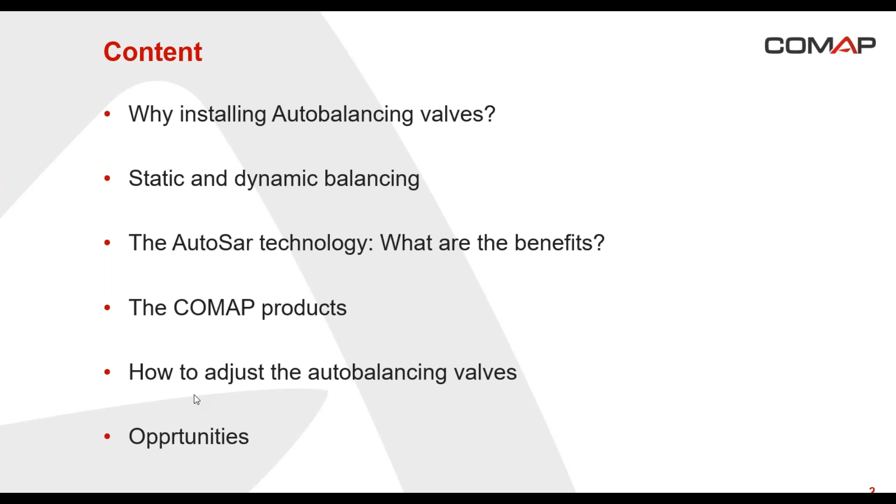The content of my presentation is as following. First, the reason why it's interesting to install auto-balancing valves on the radiators. Then I'll bring you back to the basic knowledge about static and dynamic balancing, because it's not very well understood by everyone. Next, I'm going to describe the AutoSar technology to give the benefits of this technology, and I will present the full range of the COMAP products. A reminder about the way of adjusting the nominal flow in the radiator, and at the end some figures to show you how much we can save with the AutoSar technology.

So let's start with the reason why it's smart to install auto-balancing valves. The example is a residential building where all the radiators are equipped with classic thermostatic valves. The heating network is properly balanced. That means all the radiators get the right water flow.

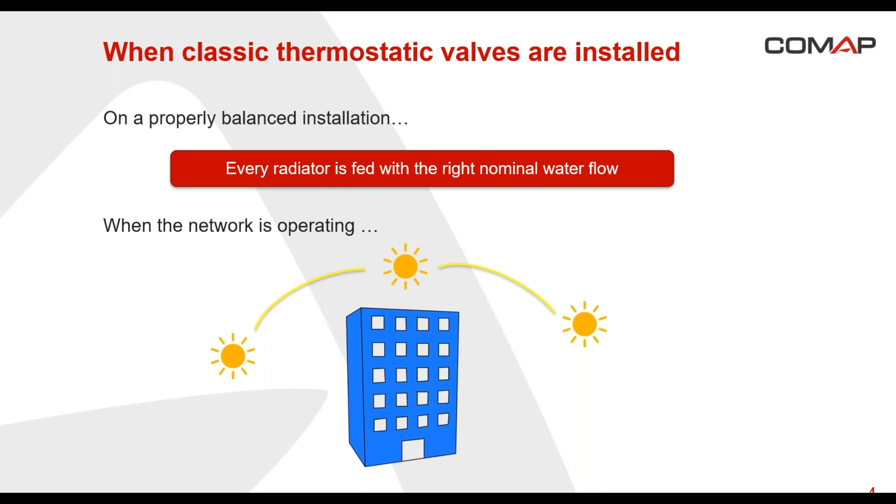Now, what happens when the heating network is operating? In January, for example, there are some sunny days. In the apartments that receive the heat from the sun, the thermostatic valves close because the ambient temperature is getting higher. In the apartments where there is no heat contribution, the valves remain open. When the valves close, the water has to go somewhere, and overflows occur through the open thermostatic valves.

You may say that the pump is going to adapt to the situation and decrease its speed in order to reduce the water flow. That's true, but the pump can only see the pressure at its terminals; it's not able to see the radiator terminals. It's too far, so it's not enough, and it's necessary to add something to improve the energy saving in the network.

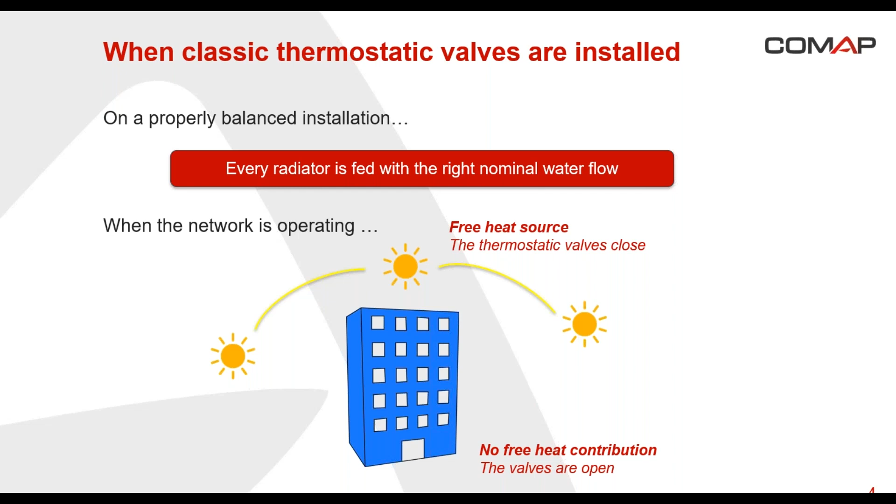So we've just said that there is a water overflow into the network. As a result, an overflow in the radiator means too much heat. Too much heat means that it's not comfortable for the people because it's too hot, and it's also too expensive.

Next, an overflow means also that the water velocity through the valve is higher. It may lead to noise, and it's not comfortable, and it costs money also. A higher velocity will also lead in time to the premature wear of equipment, and it will cost money. And third, an overflow will lead to a higher water return temperature, and the boiler may not condensate. It also costs money.

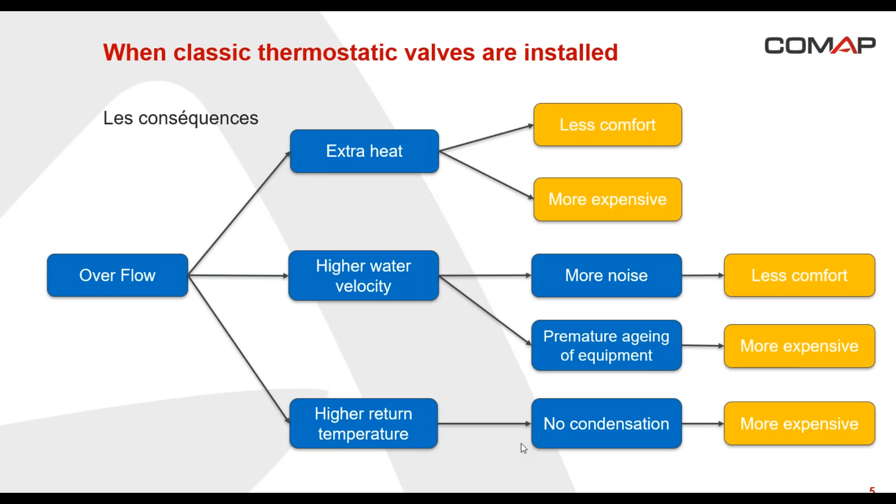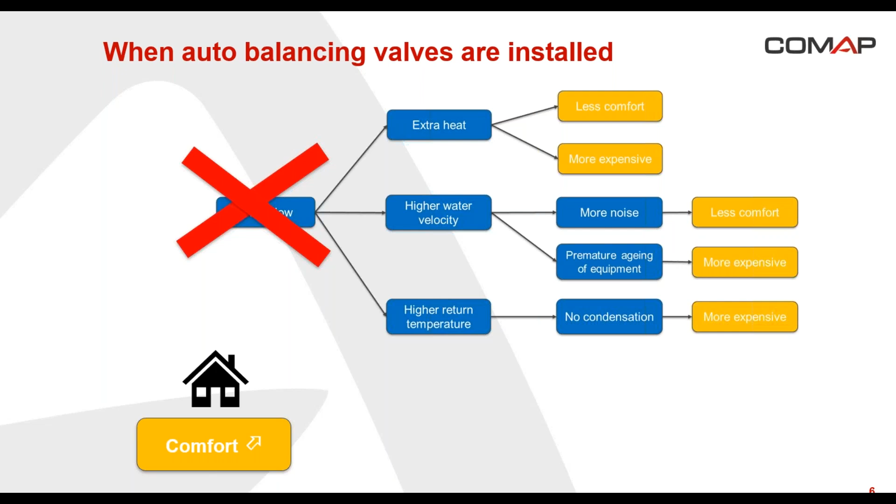So when auto-balancing thermostatic valves are installed, there is no overflow in the network. That's the function of the auto-balancing thermostatic valve, to prevent overflow in the radiator. As a result, if there is no overflow, the comfort is guaranteed. There is no noise, there is no extra heat, there is no parasitic power consumption, so it's money saving. And as you are going to see in this presentation, AutoSar is easier to adjust.

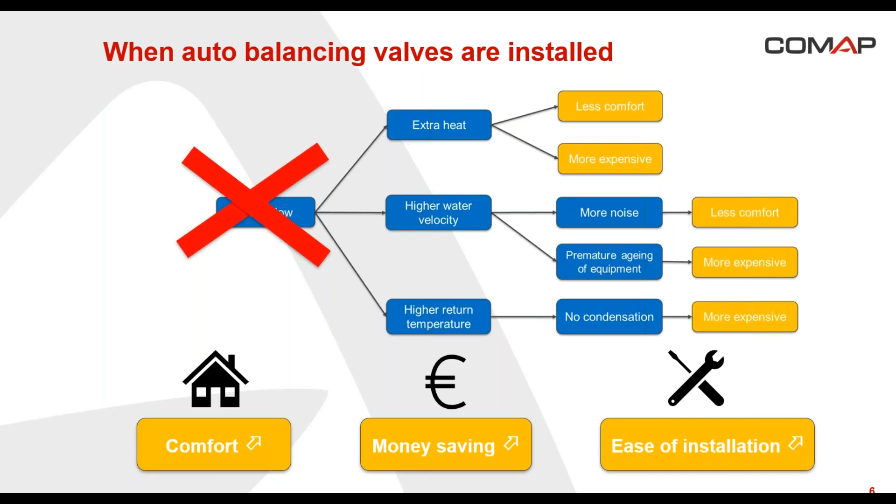Now let's talk about static and dynamic balancing. I've tried to illustrate that with pictures. First, the static balancing. Imagine a tank, here it's a kind of tank with a tap above. First of all, the level of water is adjusted. In the heating network, we have to adjust the flow for every radiator.

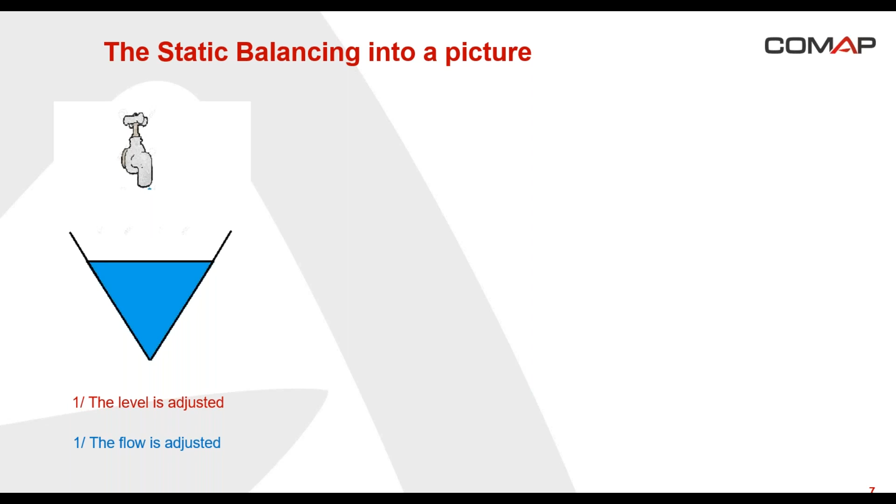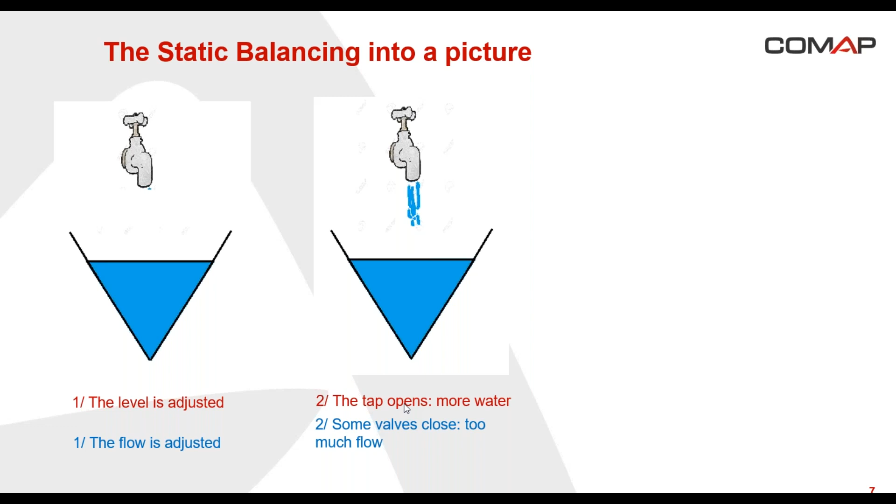Now the installation is operating, and the tap opens, so the level is increasing. There is too much water. In the radiator network, some thermostatic valves close and some valves remain open, and there is too much water through the valves that remain open. As a result, for the tank, it's flooding. In the heating network, a water overflow occurs through the valves that remain open.

In that case, the first thing was to adjust the level in the tank, or regarding the heating network, to adjust the flow everywhere. That's the static balancing. It must be done all the time. When the network is operating, it doesn't prevent overflow through the valve.

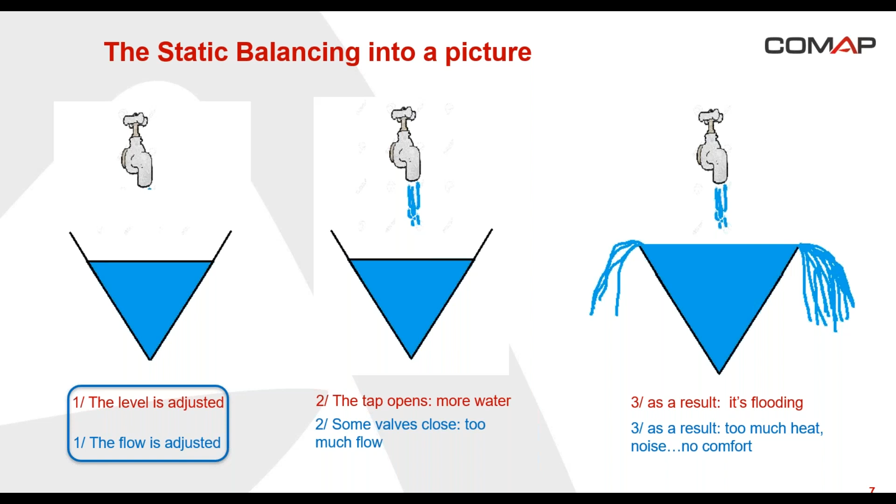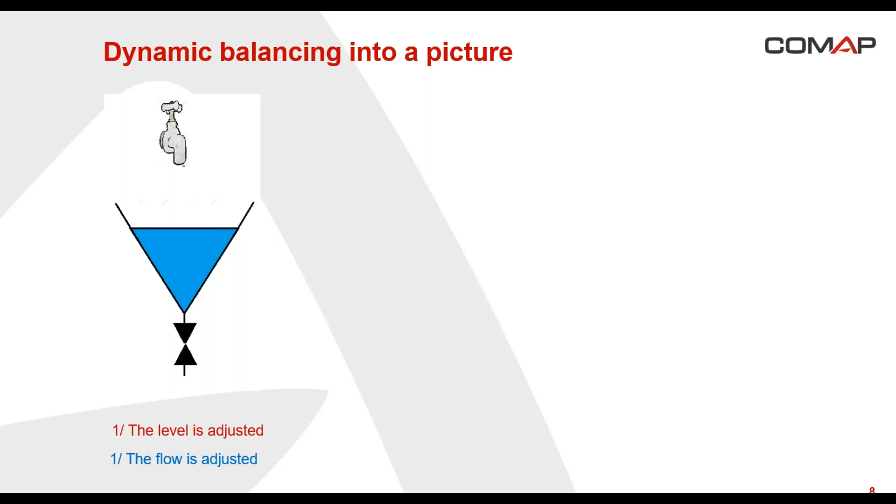Let's move now to the dynamic balancing. There is the same tank, the tap, but now there is a draining pipe and a draining valve. As previously, we start with adjusting the level in the tank, and in the heating network, we start with adjusting the flow. We said that's the static balancing.

Now the installation is operating and the tap opens, so there is more water and the level is increasing, and as previously in the heating network, when some valves close, there is too much water for the rest of the radiators. But in this case, there is a draining valve, and so the draining valve opens and the level is controlled and remains the same whatever the water amount is added.

In the heating network, AutoSar controls the flow and no overflow will go through the radiator. That's the dynamic balancing. On one hand, the flow is adjusted, that's the static balancing. On the other hand, we can add a flow control, that's the dynamic balancing.

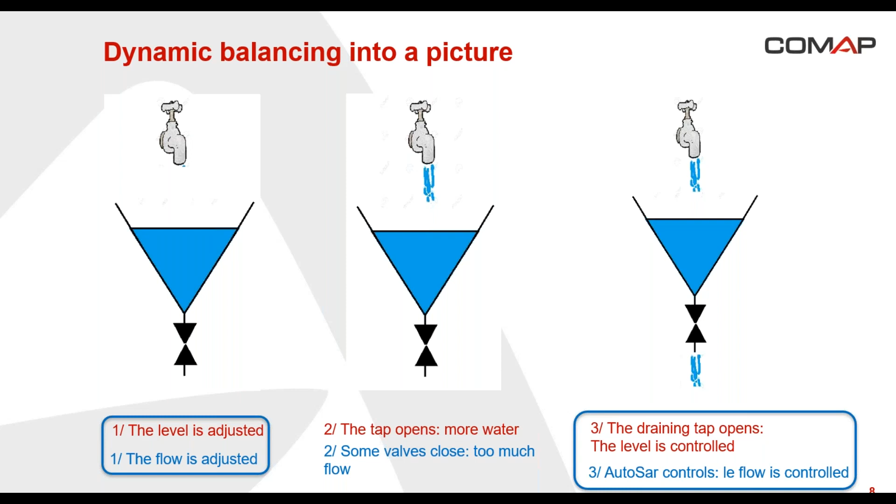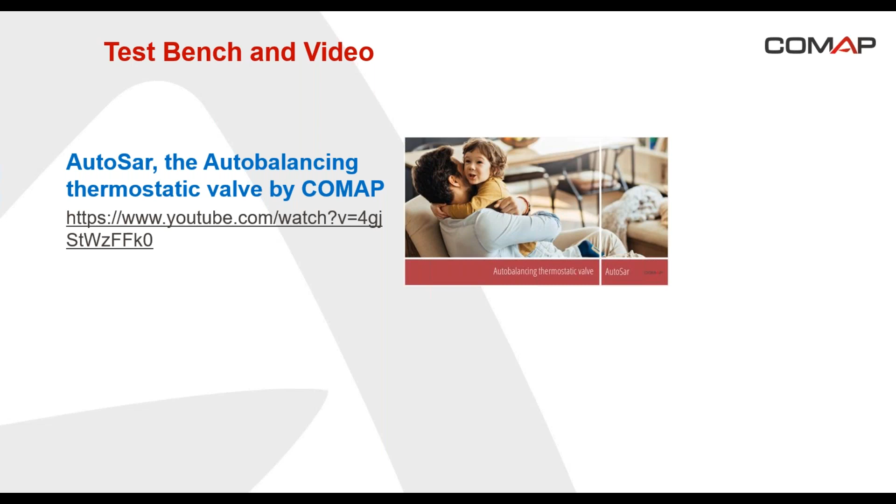As a reminder, I recommend watching the video called AutoSar, the Auto Balancing Thermostatic Valve by COMAP. It's on YouTube and the access is free. The video shows a test bench, and you will see the water overflow on one hand and the stable flow on the other hand where AutoSar is installed. This video is available in different languages.

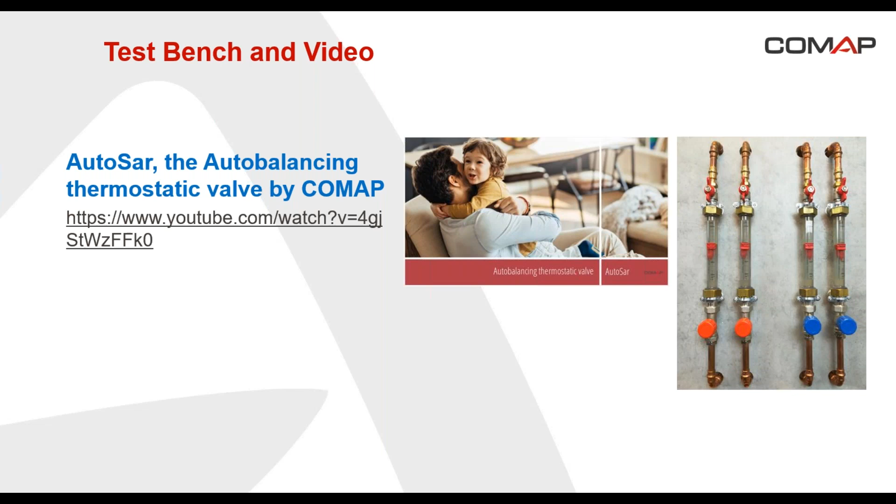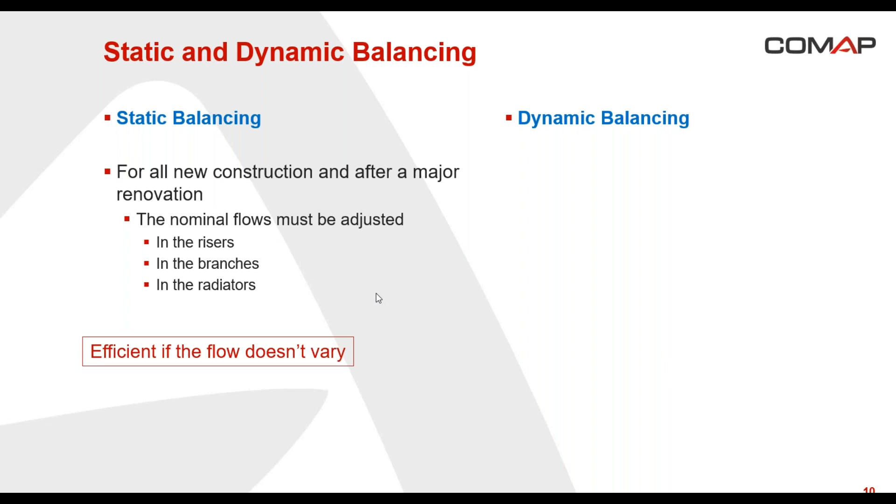So to sum up what I've just said, static balancing must be done to set all new installations in new buildings and after a big renovation, such as wall insulation, because the heat needed after the insulation is changing. The static balancing is done on the risers, on the branches, on the radiators. It's efficient only if the flow doesn't change too much when the heating network is operating.

The dynamic balancing is necessary when the flow changes in the heating network, so when the network is operating. It prevents overflow in the radiators. The adjusted nominal flow will never be exceeded. The dynamic balancing allows optimizing energy consumption while ensuring comfort for the people. It's the best way to balance an installation.

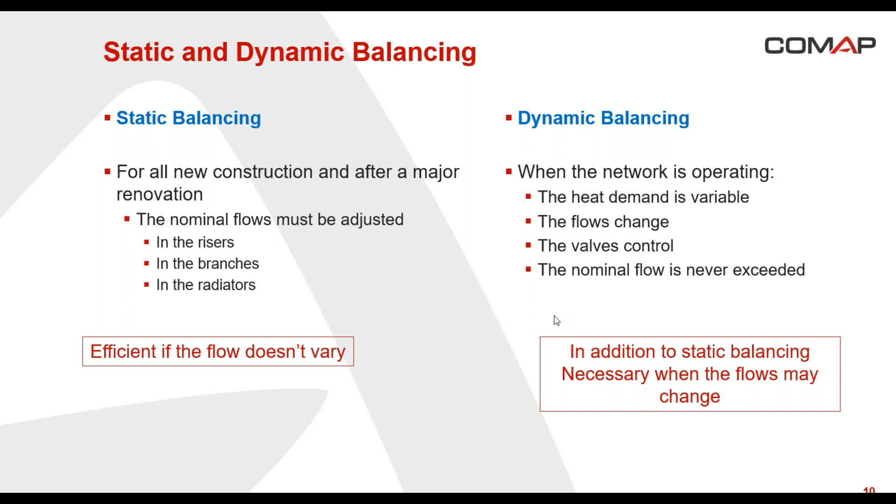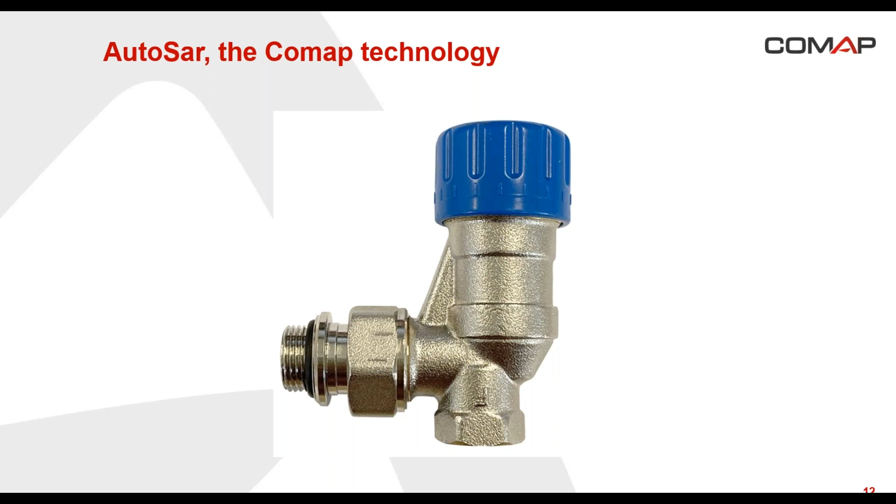So now I'm going to describe the AutoSar technology. Here is the AutoSar, the auto balancing thermostatic valve by COMAP. You already know it because it has been on the market for 2 years now. Let's describe its technology. It's a thermostatic valve, so there is a needle.

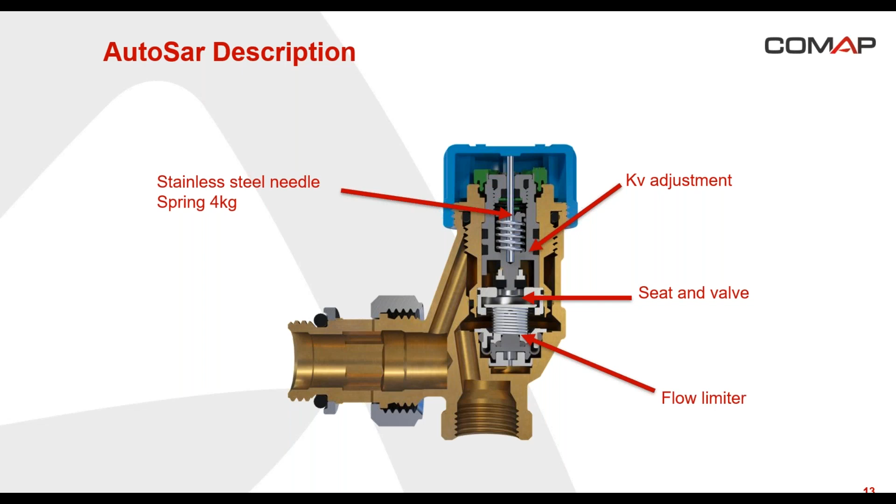The spring is set to 4 kilograms. The part in gray here is for the Kv adjustment, that means it allows adjusting the nominal flow. The seat here, and the flow limiter that prevents overflow through the valve and through the radiator.

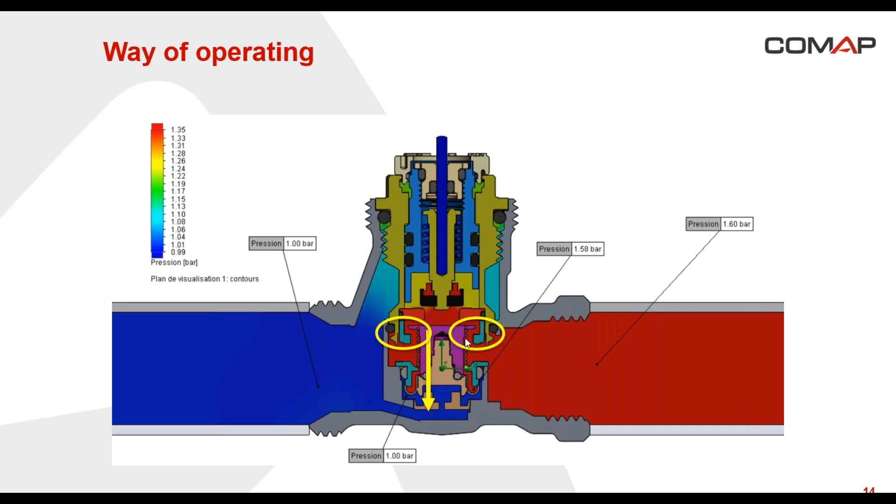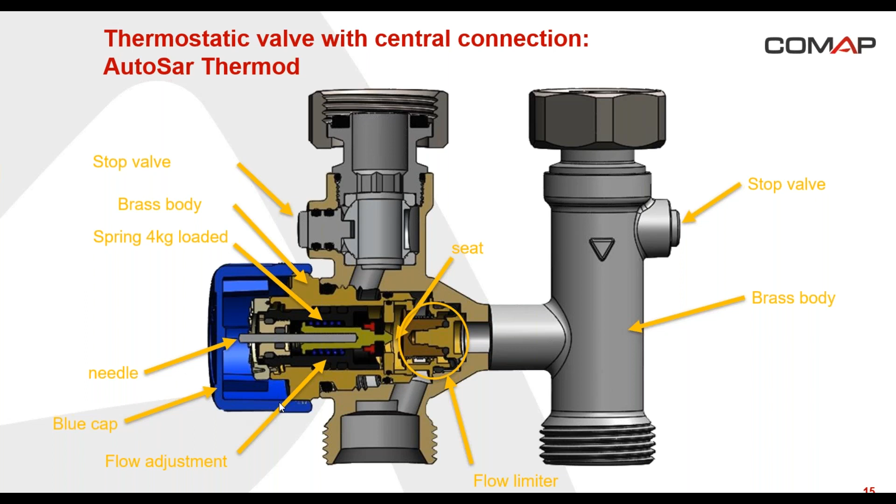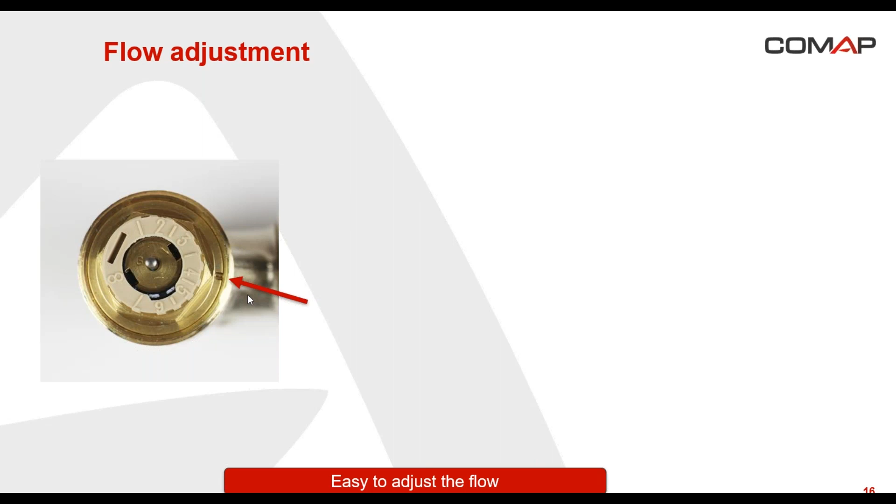As the technology is the same for the full range of the COMAP auto-balancing valves, the way of adjusting the flow is the same. You can see a top view here of the thermostatic valves. The notch of the body here is used to select the flow. There is a key which is graduated in liter per hour. For example, if we want to adjust 60 liters per hour, the figures have to be in front of the notch from the body. So it's very easy to set.

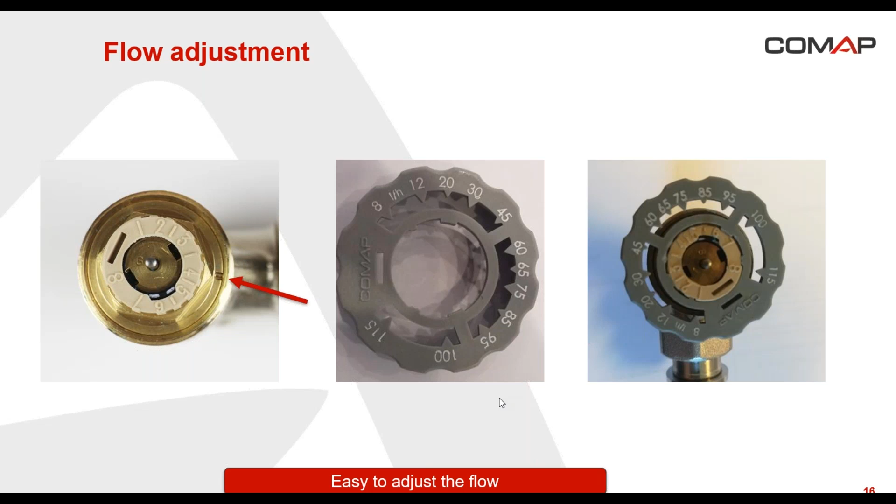Let's talk now about the benefits. I'm going to focus only on the product benefits. There are 2 key features concerning the auto-balancing thermostatic valves which are really important. The first one is the flow control accuracy.

Only COMAP, only AutoSar, controls the flow on the full scale. So pay attention to that, pay attention to the flow control accuracy. That's the first key feature of the auto-balancing thermostatic valve.

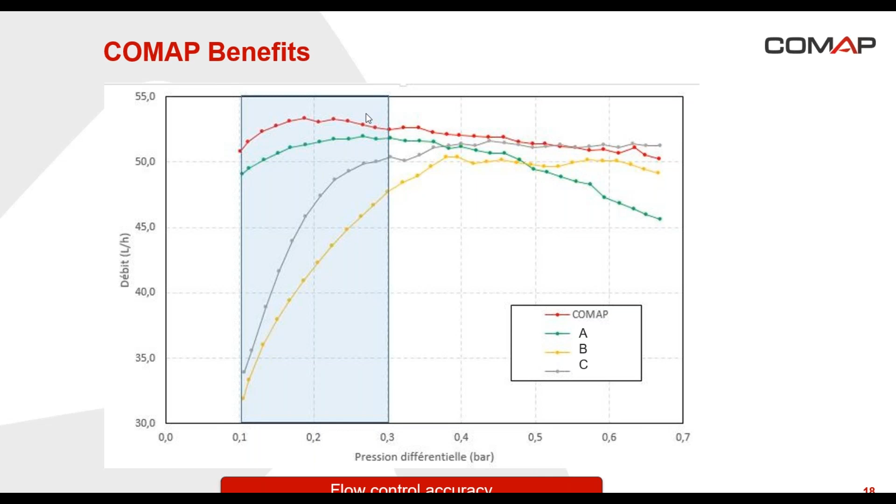The second feature is also really important: it's the lifetime of the valve. The product must be robust and ensure that the pressure information is right over time, and that the flow limiter is doing the job over time.

So don't forget two important features: the flow control accuracy and the lifetime of the product.

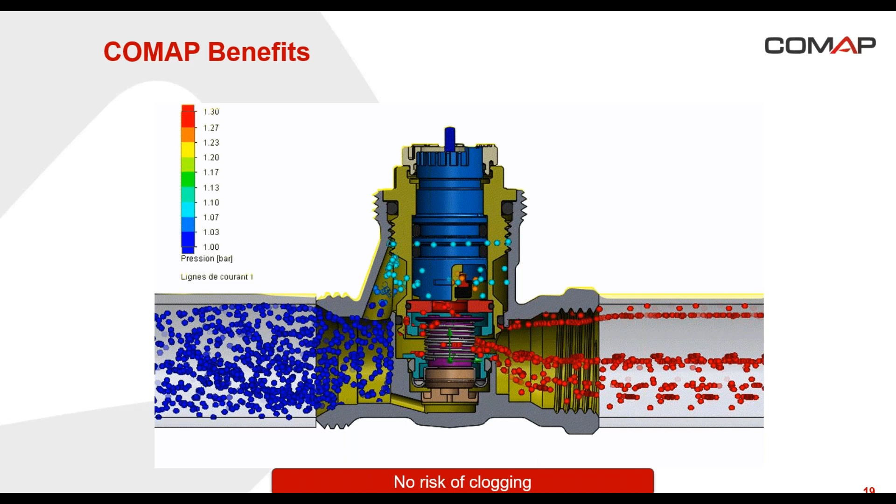Now I suggest describing all the COMAP solutions to connect the radiator. First, AutoSar, you know it - it's the right choice for the side connection of the radiator. The shapes may be straight, angle, and inverse angle. The dimension of the head is M30, and the O-ring is standard on AutoSar.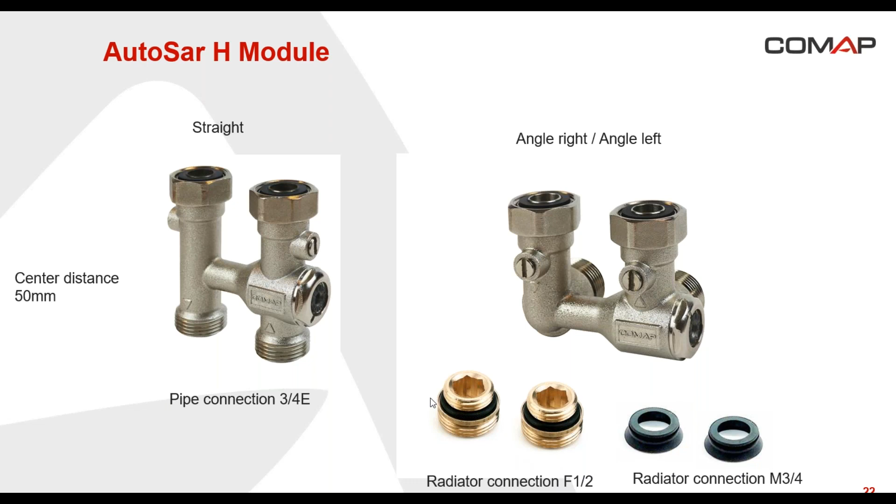COMAP still provides all the fittings, whatever the pipe material. The radiator connection is female half or male 3/4. We need the right adapter to connect the radiator.

Now the AutoSar Thermod, for panel radiators such as a towel dryer or a high panel radiator that needs to have the head at the bottom of the radiator.

As previously, the shapes are straight, angle right, angle left. The head is M30, the center distance is 50 mm, the radiator connections are female half and male 3/4, and the pipe connection is 3/4 Euroconus.

This product is used for the Flexo design by COMAP, which is a 4-in-1 solution and an aesthetic solution for the towel dryer, for example.

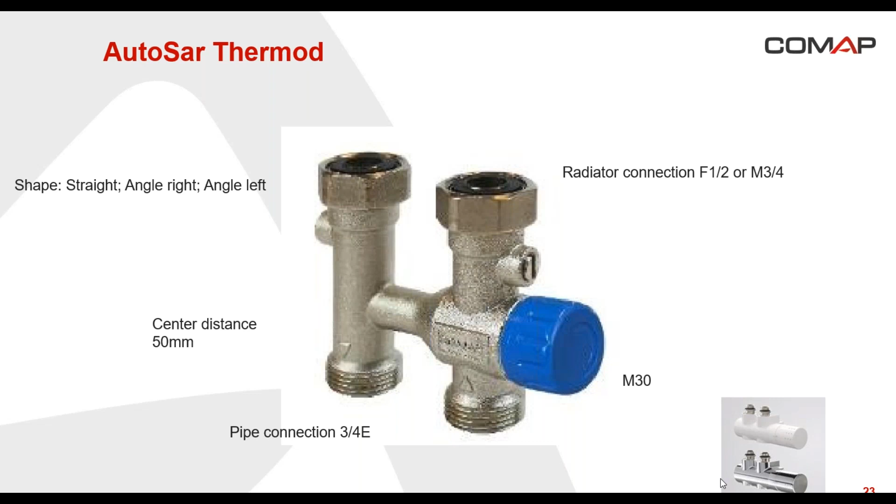The last product of this range is the kit Hydrocable. It's for a lateral connection of the radiator. It's a simple way to connect the radiator without thinking of an aesthetic issue.

The result is aesthetic because, as you can see in the picture, only the metallic part is visible and the pipe is hidden behind the radiator. It's also fast to install thanks to the press or slide fitting and the double O-ring. It can be connected to the PEX pipe 12 mm.

So what should be remembered here is that COMAP offers all the solutions, whatever the kind of radiator you want to install. You can adapt the auto-balancing thermostatic valve to the radiator, and you don't have to do the opposite. So it's a peace of mind solution.

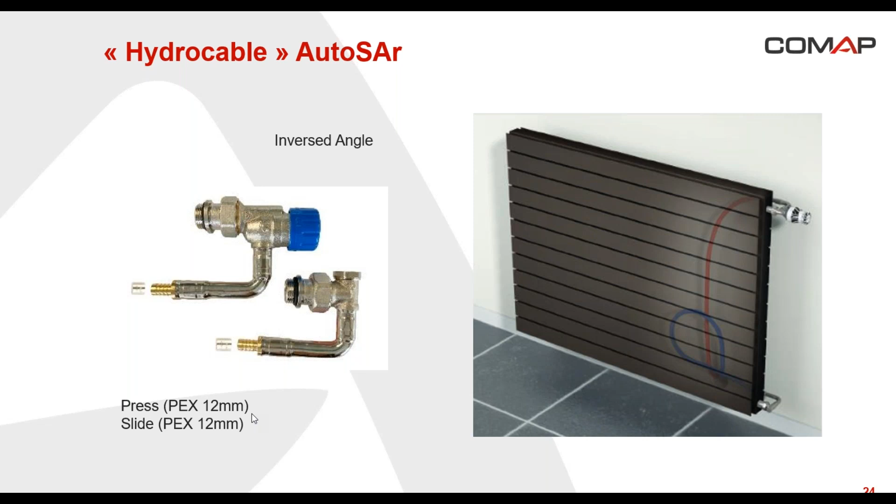Now I'm going to give you some figures to highlight the benefits of AutoSar. A simulation has been done using a calculation tool whose purpose is to help the design office make the right choice regarding the network in order to save energy while keeping comfort.

The studied case was a residential building. The number of radiators is 54. The heat supply is achieved with a heat pump of 50 kilowatts and a boiler of 106 kilowatts. Four different ways of balancing were studied.

The first one is a reference with only thermostatic valves on the radiators. The second one, case number 1, was thermostatic valves and static balancing on the branches. Case number 2 was thermostatic valves and dynamic balancing on the branches. The last case was auto-balancing thermostatic valves on the radiators only.

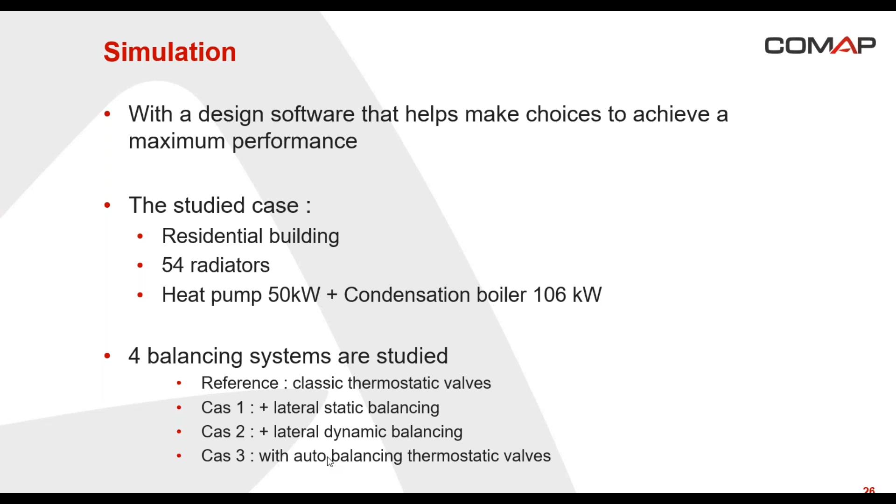The results of the calculation highlight that the network is more and more optimized from the reference to case number 3, and auto-balancing valves give the best result regarding energy saving and efficiency.

Let's see the figures. With auto-balancing thermostatic valves, 14% savings on pump energy consumption. The heat pump contribution to the heat supply is more important, 7% more. That means the boiler is less used, and as a result, less gas is consumed.

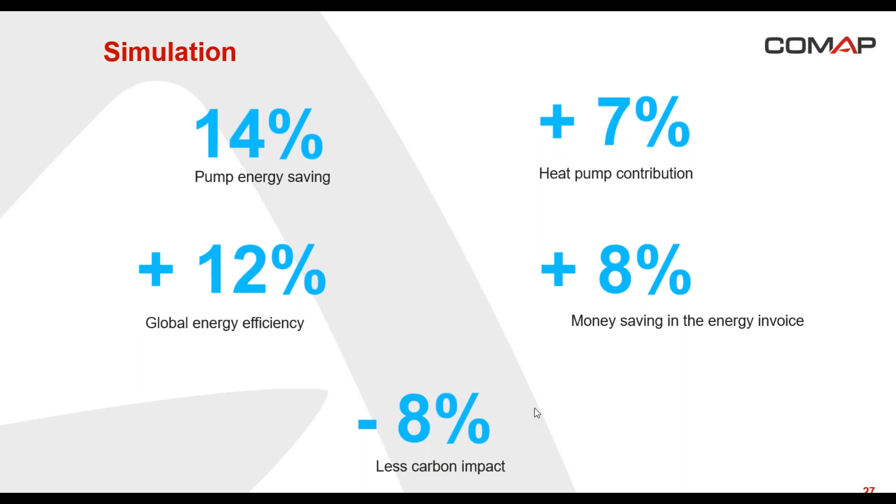The global energy efficiency is 12% better, and as a consequence, the invoice is 8% lower. There is also an impact on the carbon footprint, which is better, with the carbon impact 8% lower. These figures are significant enough to make us interested in AutoSar.